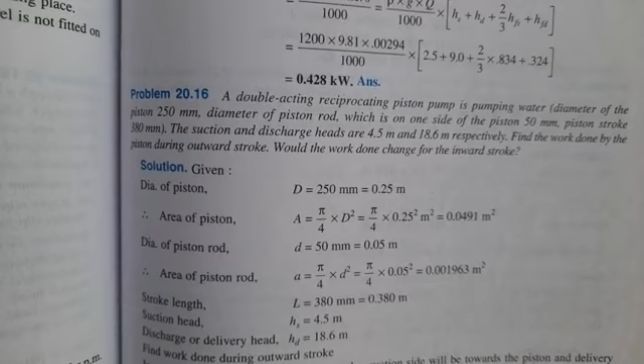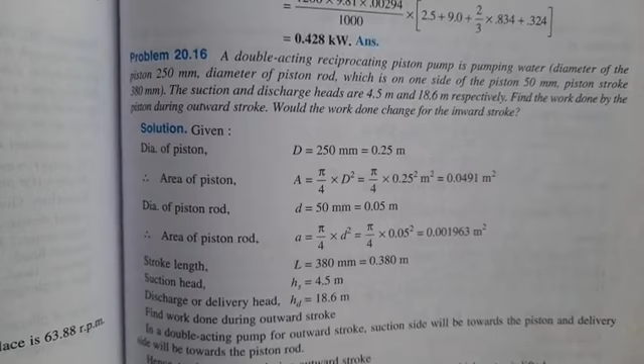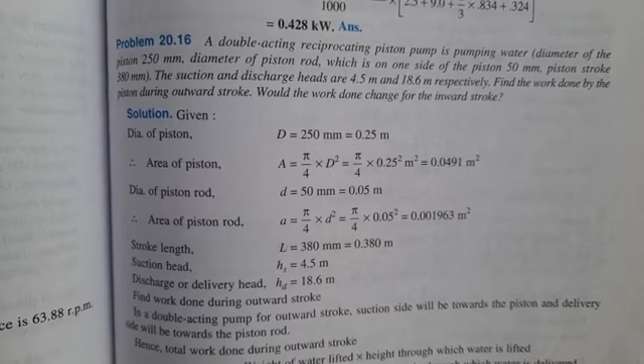A double-acting reciprocating pump is pumping water. Diameter of the piston is 250 mm, diameter of piston rod on one side of the piston is 50 mm, piston stroke 380 mm. The suction and discharge head are 4.5 meter and 18.6 meter respectively. Find the work done by the piston during outward stroke. Would the work done change for the inward stroke?

Data given: diameter of piston equal to 250 mm equal to 0.25 meter. Area of piston equal to pi by 4 D square, equal to pi by 4 into 0.25 square. This area comes 0.0491 meter square.

Diameter of piston rod d equal to 50 mm equal to 0.05 meter. Area of piston rod equal to pi by 4 d square, equal to pi by 4 into 0.05 square. This area comes 0.001963 meter square.

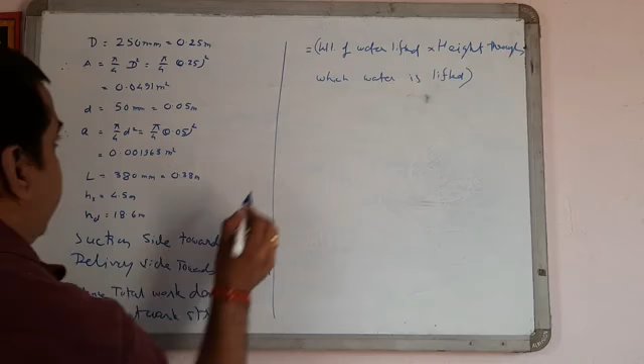Total work done during outward stroke is equal to weight of water lifted into height through which water is lifted, plus weight of water delivered into height through which water is delivered. That is equal to rho into g Q1 HS.

Plus rho g Q2 HD. These are the formula here.

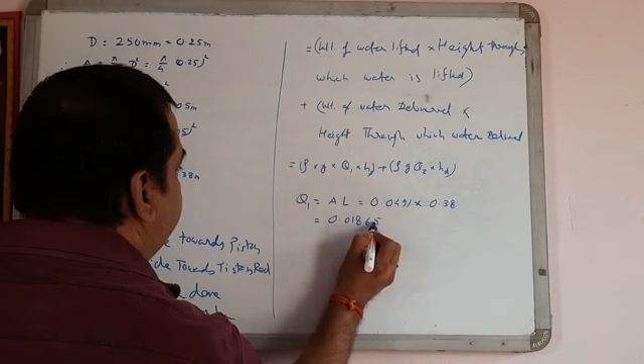During outward stroke, Q1 equal to A into L. Here area is 0.0491 into length is 0.38. So this Q1 comes 0.01865 meter cube.

Now Q2 equal to A minus a, into L. That is equal to 0.0491 minus 0.001963, into 0.38. So this value of Q2 comes 0.01791 meter cube.

Total work done during outward stroke equal to: value of rho is 1000 for water, g is 9.81, into 0.01865 into HS is 4.5, plus 1000 into 9.81 into 0.01791 into HD is 18.6. So this value comes to 4.0913 kilojoule. This value comes in joule, and that divided by 1000 gives kilojoule.

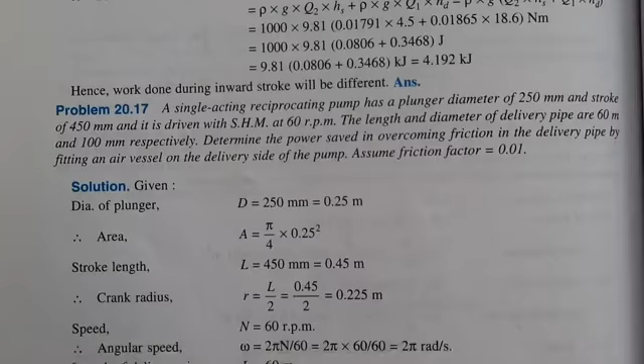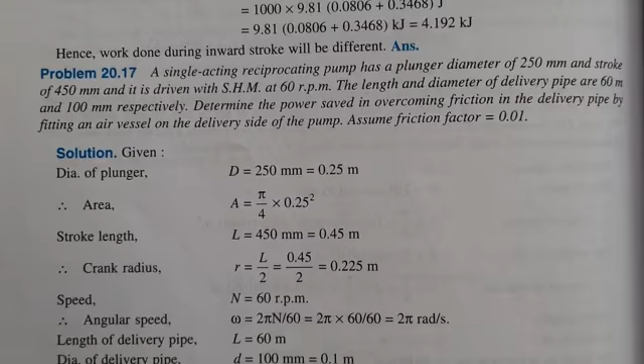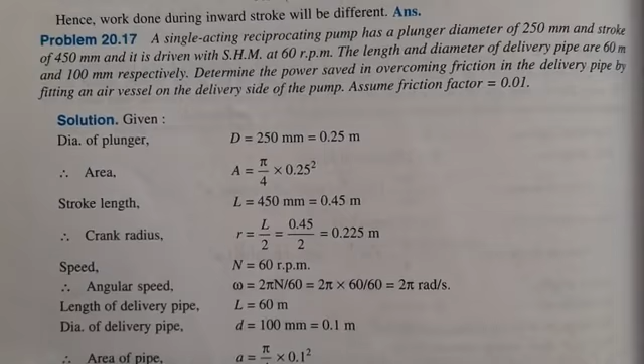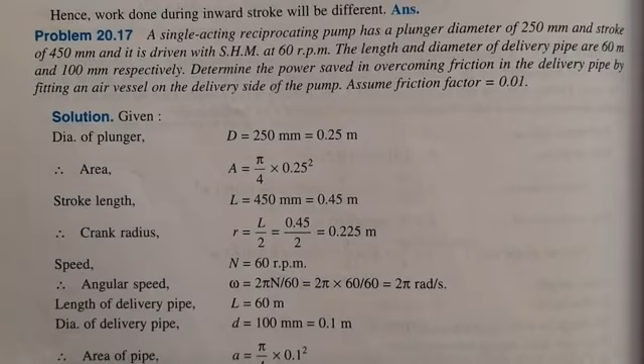Next question: In a single acting reciprocating pump, plunger diameter is 250 mm and stroke of 450 mm, and it is driven by simple harmonic motion at 60 rpm. The length and diameter of delivery pipe are 60 meter and 100 mm respectively. Determine the power saved in overcoming friction in the delivery pipe by fitting an air vessel on delivery side of the pump. Assume friction factor 0.01.

Here data given: diameter equal to 250 mm equal to 0.25 meter. So area equal to pi by 4 d square, equal to pi by 4 into 0.25 square. Stroke length is given as 450 mm equal to 0.45 meter. So crank radius equal to L by 2 equal to 0.225 meter. N is given 60 rpm.

So angular speed omega equal to 2 pi N by 60, that is equal to 2 pi into 60 by 60, equal to 2 pi radian per second. Length of delivery pipe L equal to 60 meter, and diameter of delivery pipe is 100 mm equal to 0.1 meter. So area of pipe A equal to pi by 4 d square, pi by 4 into 0.1 square, and friction factor is given as 0.01.

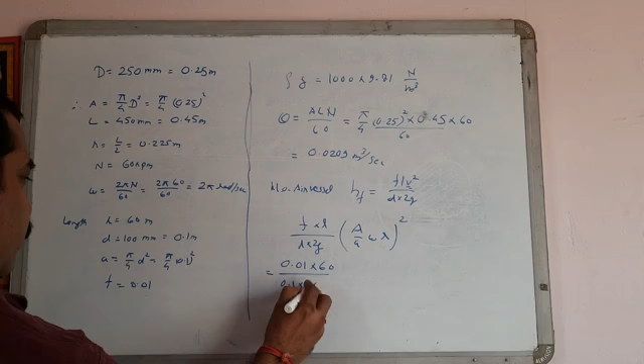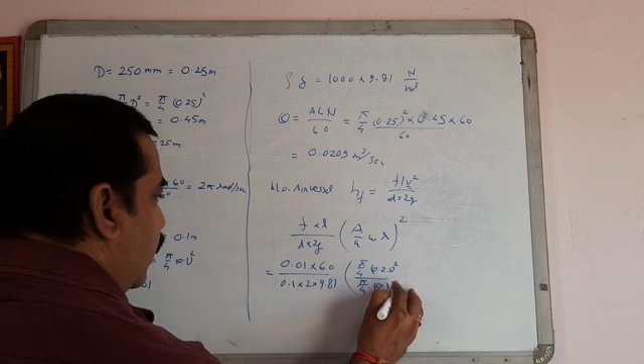Without air vessel, HF equal to F L V square by D into 2G. Now F into L by D into 2G, and the value of V can be replaced as A by a, omega R. Now putting the values here: F is 0.01 into L is 60, by D diameter is 0.1, into 2 into 9.81, into A by a, this area pi by 4 into 0.25 square by pi by 4 into 0.1 square, into omega is 2 pi into R is 0.225, this whole square. So this value comes 23.87 meter without air vessel.

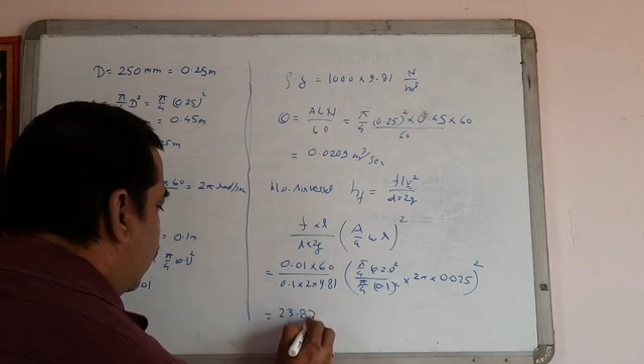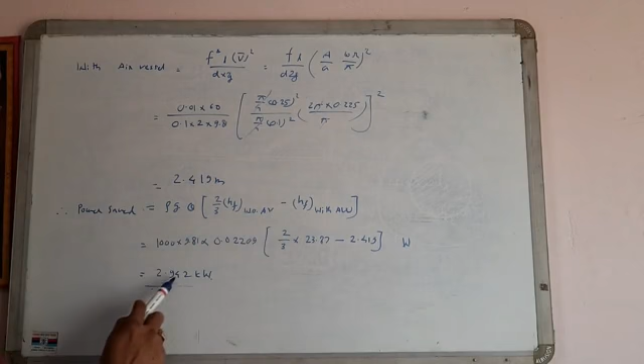With air vessel, the value comes 2.419, and power saved is this minus this. So this value comes 2.942 kilowatt. You have to do questions in similar way from the examination papers. Thank you.